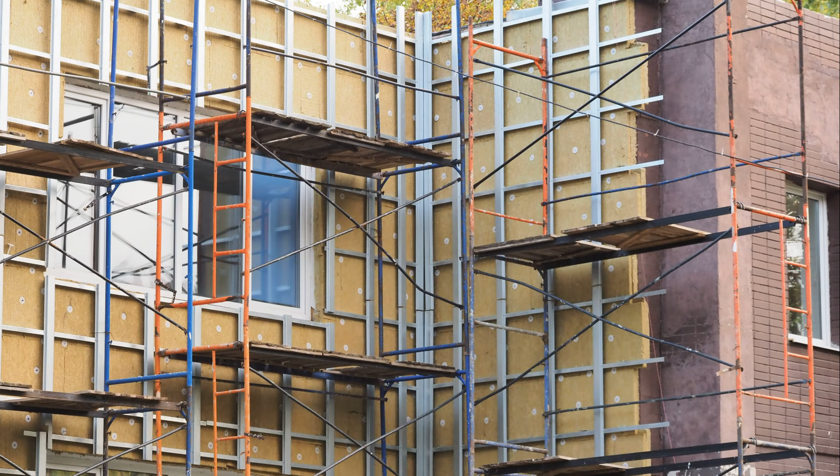Insulating old mass masonry walls always poses a challenge. Existing mass masonry walls can be insulated either from the exterior or from the interior of the assembly, with each strategy heavily depending on the site's restrictions, the project budget, the existing conditions, and the historical value of the building.

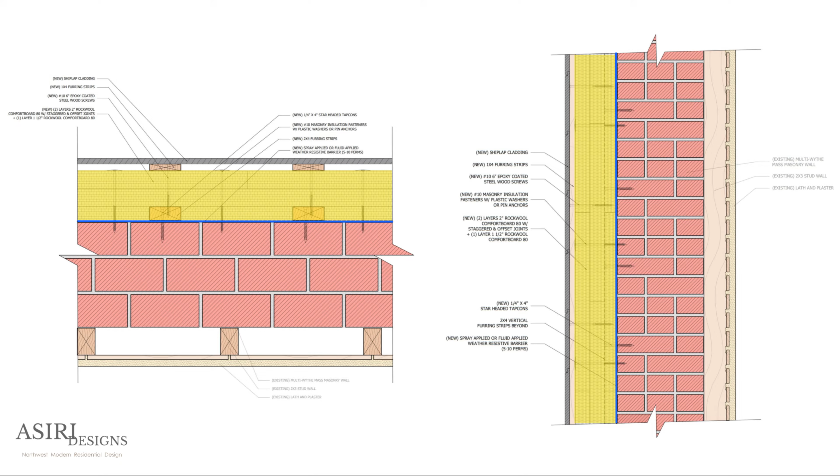While it is highly beneficial to insulate and waterproof mass walls from the exterior of the assembly from both a thermal and moisture perspective, this isn't always possible, as the old masonry facades must be preserved to retain their historical integrity and neighborhood character. So, how do we successfully insulate a multi-wythe mass masonry wall from the interior without damaging the building and causing moisture-related issues?

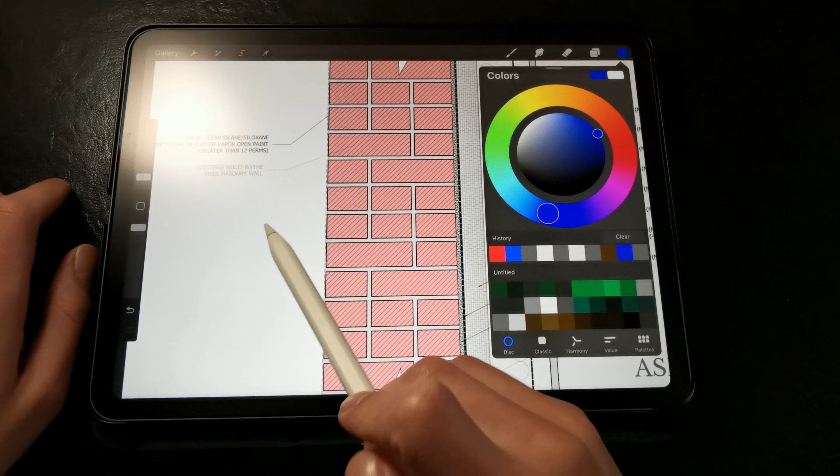Mass masonry walls control rainwater penetration by absorbing and storing water and redistributing it to the drier inner wythes in a process called hygric redistribution. The concept being that the first layer of masonry would stop about 80 to 90% of the water that entered the assembly, only allowing something like 10% to pass through.

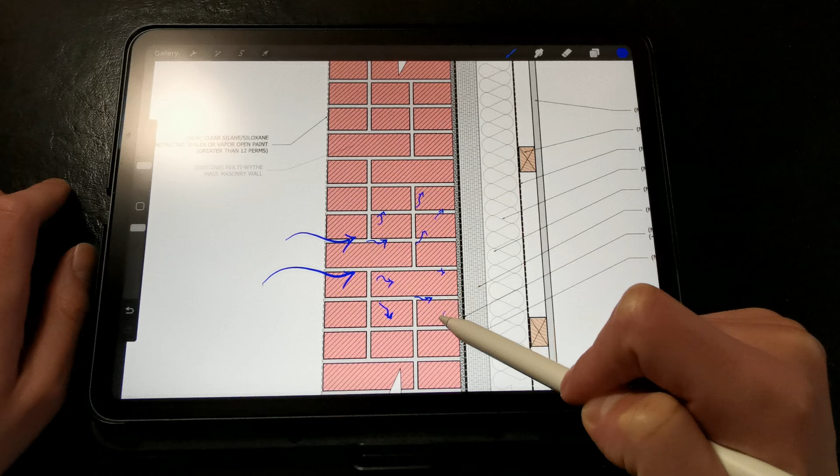The second and third layers, or wythes of masonry, would only allow 10% of the 10% of the water to actually migrate through to the interior, and by the time it actually gets there, it doesn't really matter because the water is evenly distributed and no one would really notice. This is how a lot of walls were built in many parts of the world up until wood framing became common.

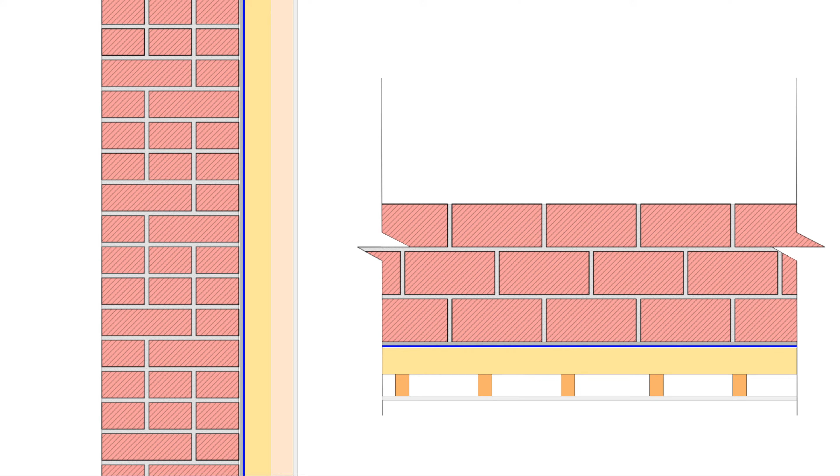However, when we go to insulate mass masonry walls and add moisture-sensitive interior materials, we significantly change the dynamics of the wall, as the masonry wall will stay wetter and colder for longer and will distribute that moisture to the interior materials, which can support mold growth and rot. Mass masonry walls also tend to have a lot of small cracks and gaps that wick liquid water deeper into the wall through capillary forces.

So, if we're to insulate these old mass masonry walls, we need an approach that allows us to reduce the amount of water absorbed by the masonry wall. We need to prevent capillary forces from sucking water inside the framed wall cavity through cracks and gaps. We need to insulate with a material that's moisture resistant but allows for vapor diffusion. And we need to prevent wintertime condensation that could deposit moisture on the interior side of the masonry walls.

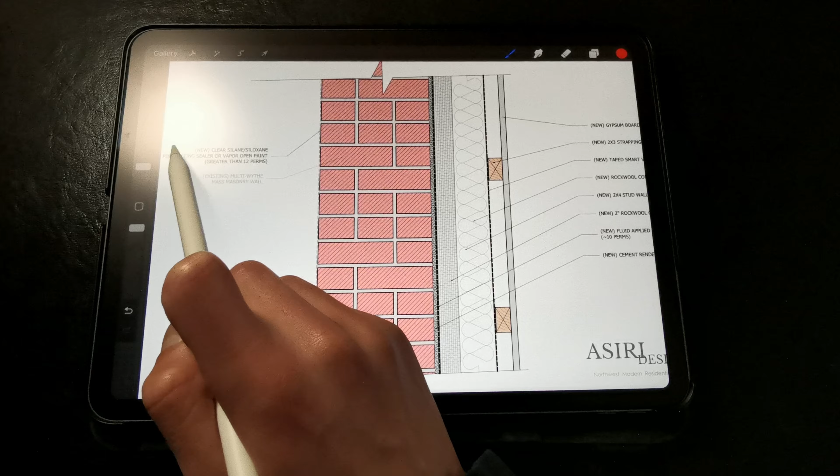To reduce surface water absorption on the exterior side of the masonry walls, we're calling out a silane or siloxane penetrating sealer, which is a chemical agent that is absorbed into the pores of the brick and mortar, making the surface hydrophobic or water repellent. Silanes and siloxanes are preferable as a penetrating sealer as they are highly vapor permeable and allow old lime mortars to dry out.

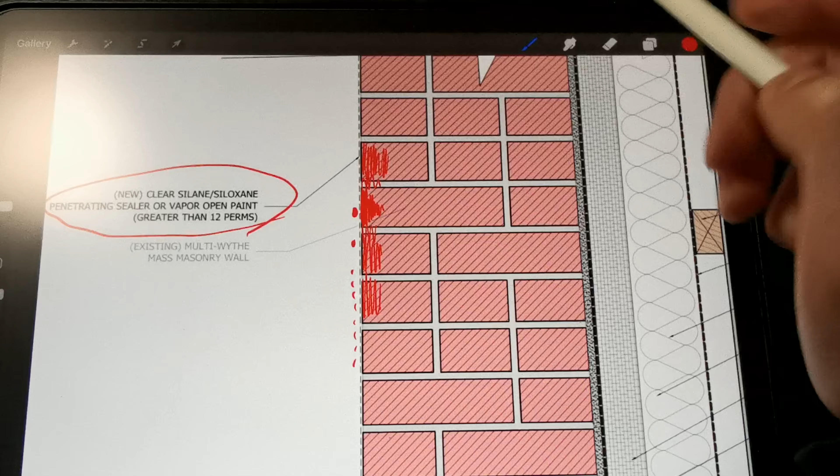While these penetrating sealers significantly reduce surface absorption, they do not fill in cracks and gaps, so liquid water can still wick through those tiny openings and make their way inside. You'll also need to recoat the surface of the masonry in this penetrating sealer every few years in order to retain its water repellency.

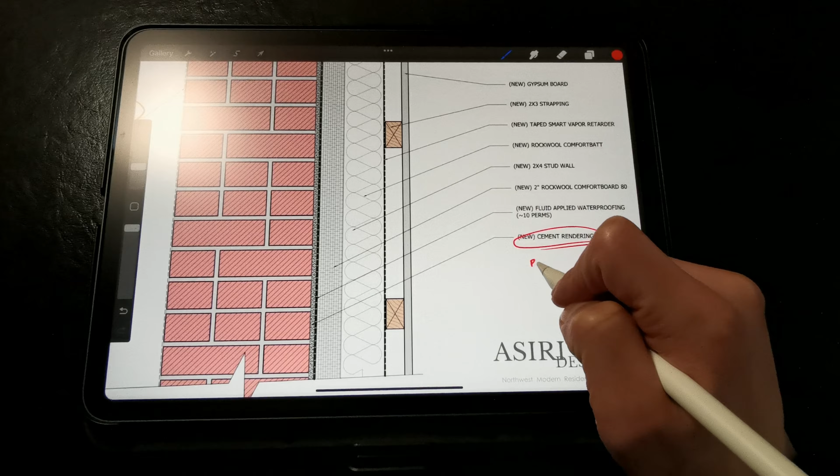Next, we are filling and covering any gaps, cracks, or voids on the interior of the masonry wall with a lime cement parge coat or parging. This parge coat prevents water that has been wicked through cracks on the exterior from trickling into the wall cavity and should closely resemble the chemistry of the mortars used for the mass wall. Typically, this is going to be a lime mortar that is highly vapor permeable.

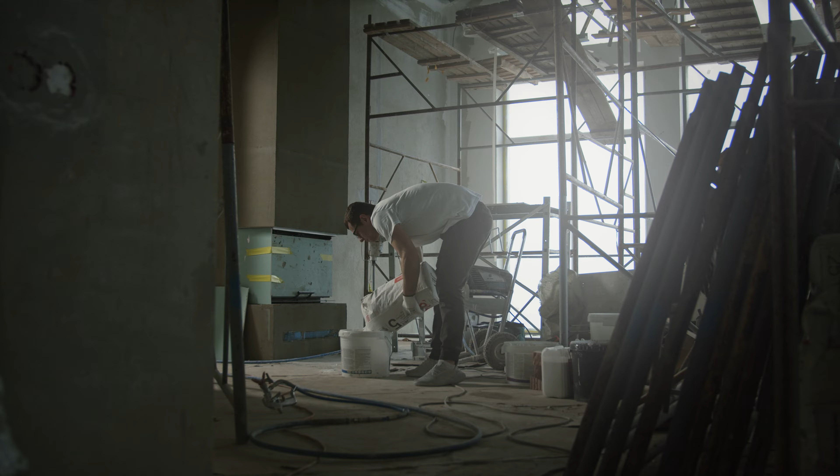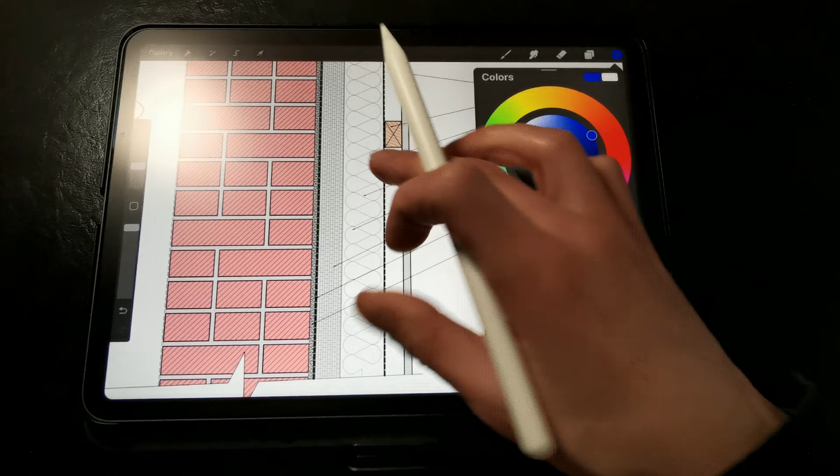We don't want any polymer modified Portland cement pargings, as these have low permeability and they have the potential to damage the old masonry wall if moisture is present. Then we install a fluid applied negative side waterproofing over the parge coat to provide extra redundancy. Some products can be applied directly to the masonry wall, however fluid applied products can't span large cracks and gaps even if they are elastomeric. The parge coat provides support and a uniform surface for the waterproofing.

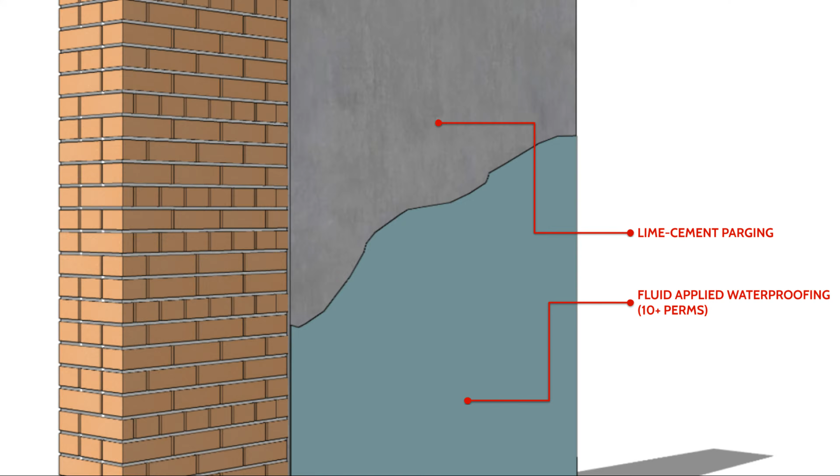The fluid applied waterproofing must be vapor permeable at around 10 perms to allow moisture to dry out of the wall to the interior. This fluid applied coating can also serve as a capillary break. There are a handful of products on the market that can serve as above grade negative side waterproof coatings for masonry walls. I personally recommend either Tremco's ExoAir 220 product or Prosoco's BMC2.

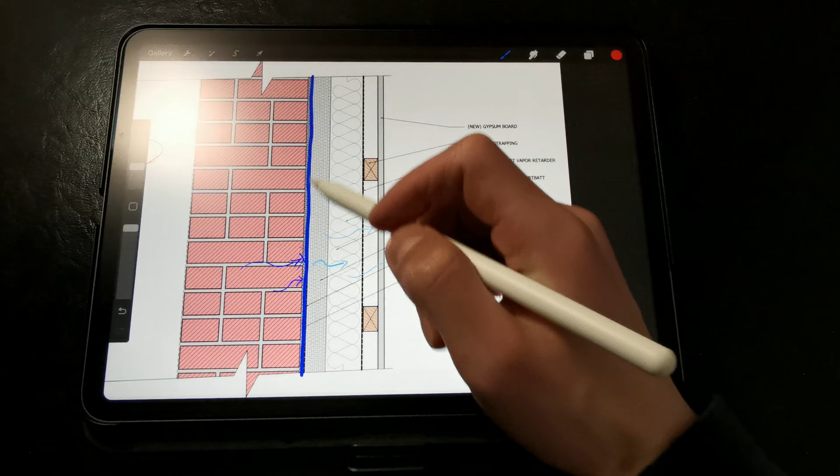This is not optional when you're using light gauge steel framing, as the conductive steel absolutely requires a thermal break. We can then install the interior framing and fill the cavities with mineral wool batts. Here we're using Rockwool Comfortbatt. Mineral wool is highly moisture resistant, hydrophobic, and vapor permeable.

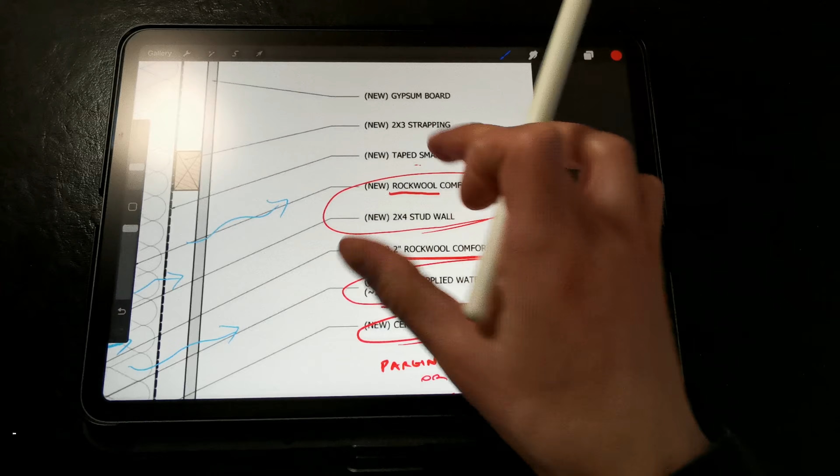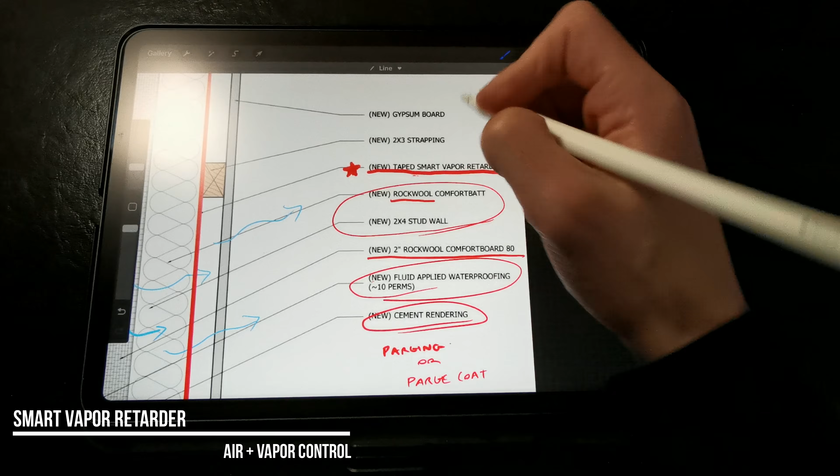Now, this taped smart vapor retarder membrane is the key to the success of this assembly. This will be serving as our air barrier as well as our vapor control to prevent wintertime condensation while allowing the wall to dry to the interior. During the cold months of the year, warm, moisture-laden interior air will want to diffuse outwards to the cold side of the wall. If it hits a cold surface, we get interstitial condensation.

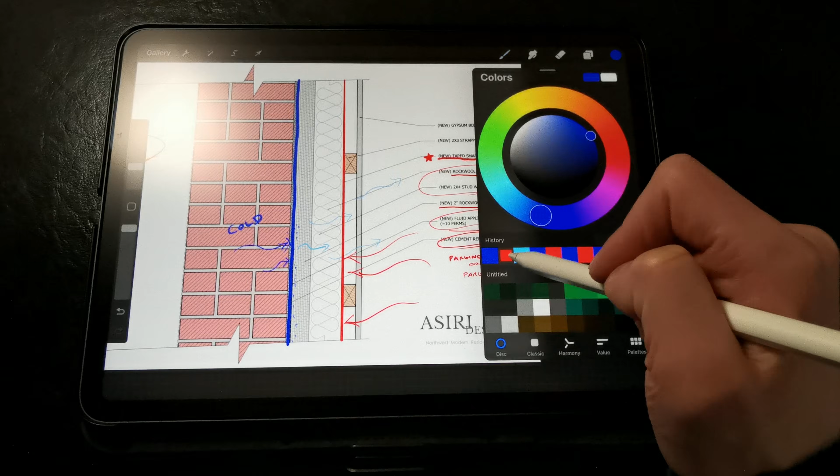This smart vapor retarder prevents that, but unlike a standard vapor barrier, the smart vapor retarders allow moisture to dry to the interior when relative humidity within the wall cavity exceeds about 60% and increases in permeability similar to wood the wetter it gets. We staple the smart vapor retarder membrane onto the studs and tape all the joints, and

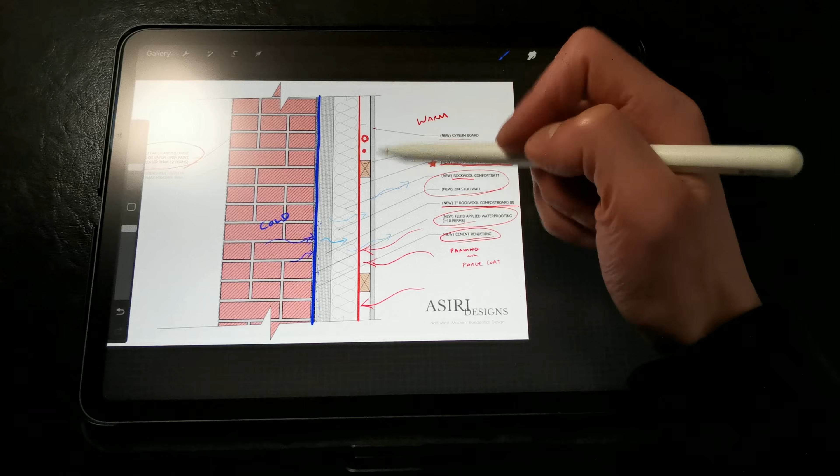then we install horizontal strapping to provide an airtight service cavity for electrical conduit, wiring, and other services. And then we attach our standard gypsum board to the strapping, reducing the amount of penetrations into the smart vapor retarder membrane. Remember, the smart vapor retarder is serving as our air barrier.

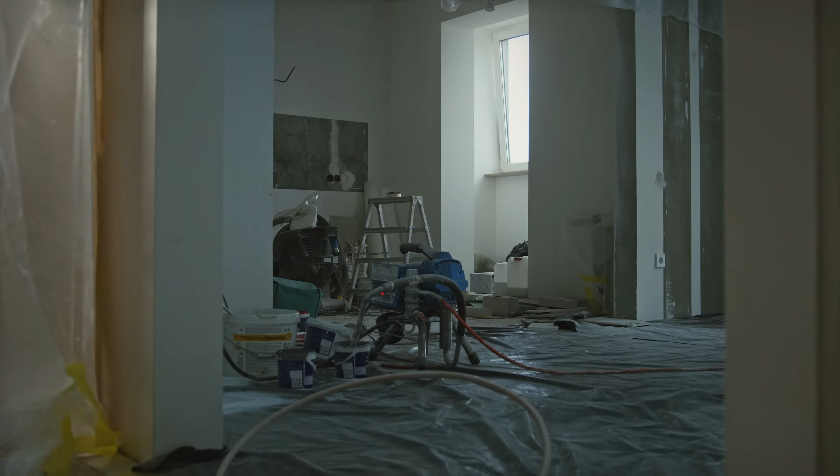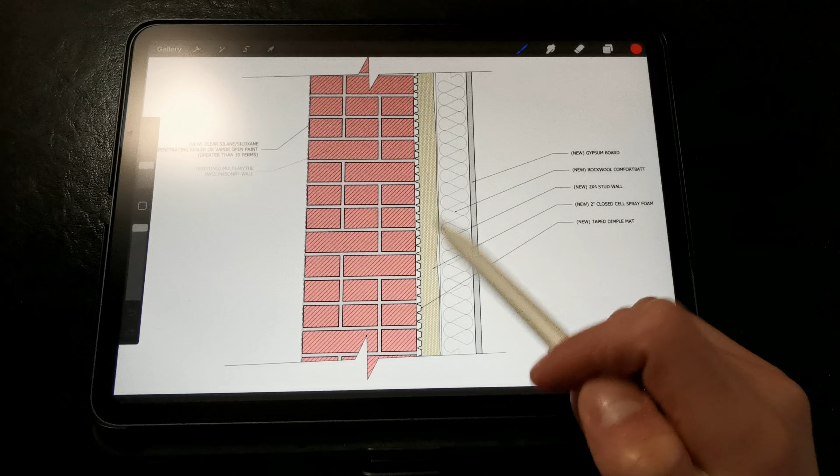Now, in this wall assembly, we are insulating with closed cell spray foam. We have to be really careful when we insulate with spray foam because it can trap moisture on the inside and it cools down the wall sufficiently in cold climates to potentially cause freeze-thaw damage, in which the water inside the masonry wall will freeze if it's cold enough, leaving behind salt deposits, which causes efflorescence and spalling to occur where the brick falls off due to high osmotic pressures, since the water present in the masonry wants to dilute the salt concentrations.

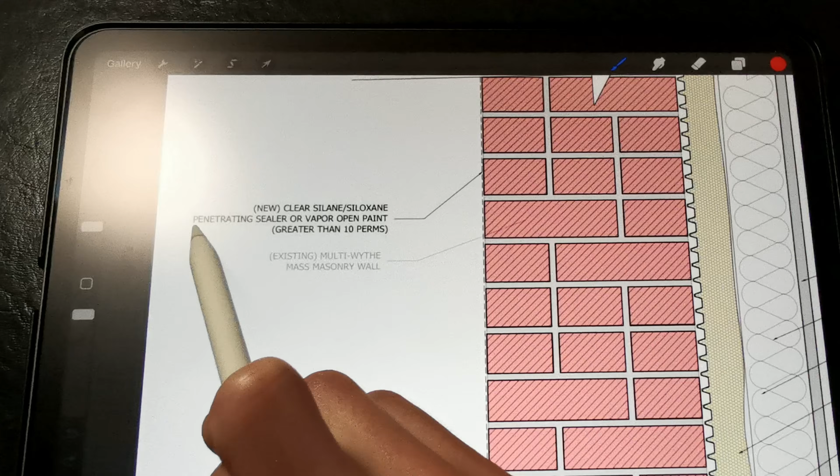So starting out, we have that same silane siloxane penetrating sealer to reduce the surface absorption of the masonry wall. Again, this only stops surface water from being absorbed into the brick. It doesn't actually stop water from getting through the cracks in the brick and being wicked inside. And of course, we have our mass masonry wall here.

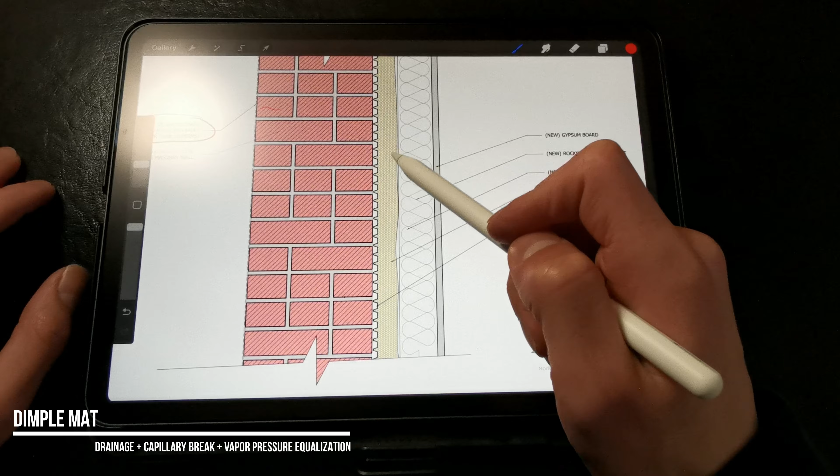Installed between the masonry wall and the closed cell spray foam layer, we have a taped dimple mat. This is really important because it provides a capillary break between the wet masonry walls and the interior framing, as well as a drainage space and an air gap between the foam and the masonry wall, allowing any water to drain out and dry, preventing water accumulation behind the spray foam layer that could result in damage.

We also need to apply a primer to the backside of the taped dimple mat to allow the spray foam to adhere to that high-density polyethylene. So after we've applied a primer to the backside of the dimple mat, we can spray about 2 inches of closed cell spray foam. We don't really want to go any higher than that in cold climates because of that freeze-thaw damage that can occur. We want some heat flow through that masonry wall, just so that the masonry wall can actually dry out.

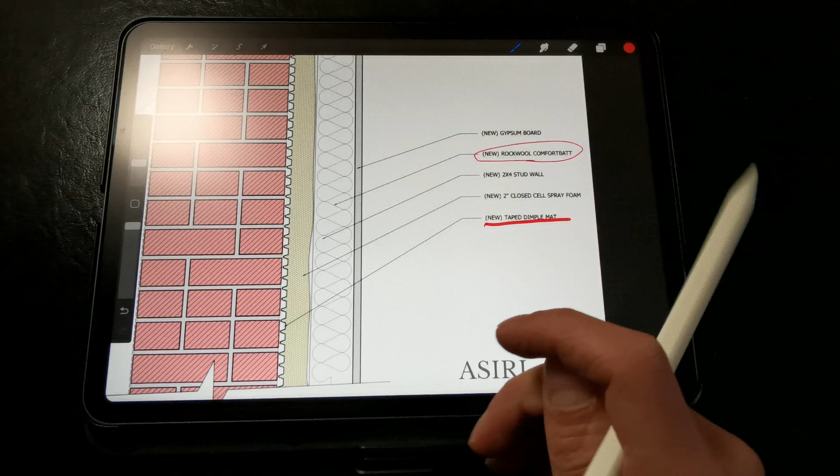Then, optionally, we can insulate the stud cavities with Rockwool batts or any other air and vapor permeable insulation. Fiberglass can work well, as well as wood fiber or even cellulose, as long as it's vapor permeable. And then we're able to install our standard gypsum board right over the studs to close out the wall assembly. So that's really the only way to make spray foam work in a mass masonry wall assembly without the risks associated with moisture, freeze-thaw damage, spalling, and efflorescence.